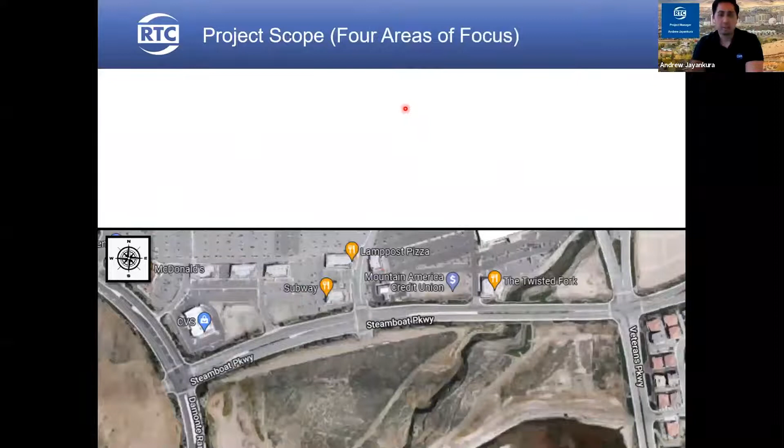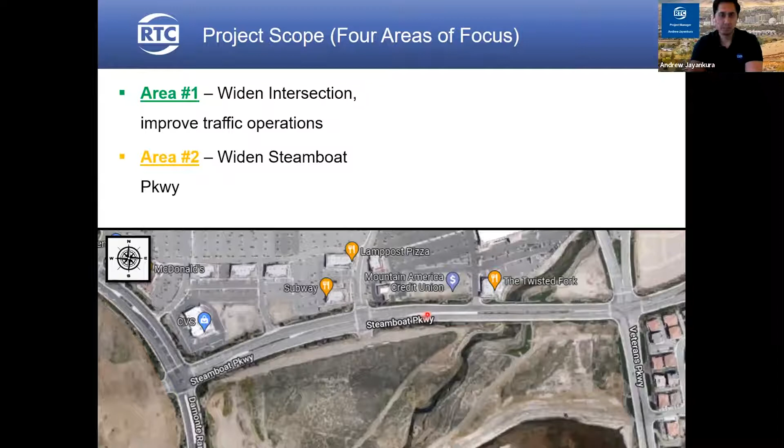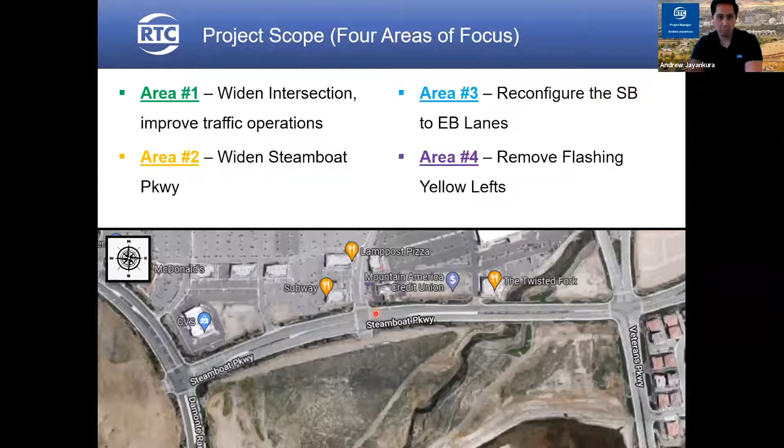Project scope: there are 4 areas of focus. The first is to widen the intersection and improve traffic operations at Steamboat Parkway and Veterans Parkway. Area 2, we're going to widen Steamboat Parkway from the current 4 lanes to 6 lanes, shown in the rectangle here. Area 3, we're going to look into reconfiguring the southbound to eastbound lanes at Damonte Ranch and Steamboat Parkway. And Area 4 will be removing the flashing yellow lefts at Marketplace and Steamboat.

Here's an overview of the 4 areas that we're going to look into improving along this project. Spend a moment here so you can take a quick look at it.

Let's move on to Area 1 and look at the highlights. Area 1 again, we'll be looking at the intersection of Steamboat and Veterans Parkway. Let's take a closer look at what we're going to be doing at this intersection.

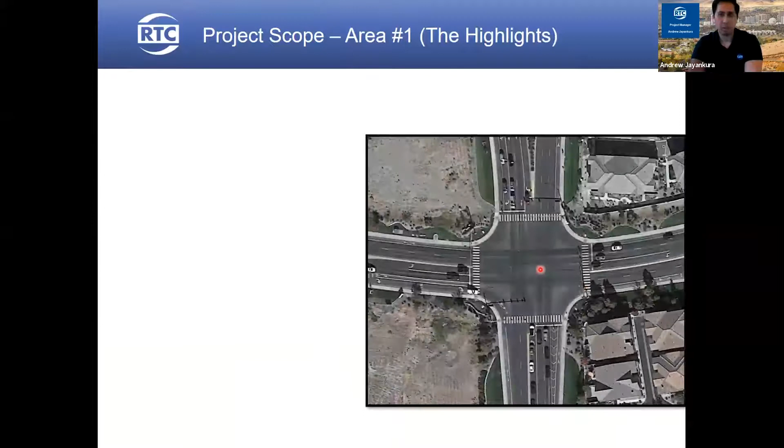Going eastbound, we're going to add an additional through lane, so the lane configuration will look something like this. Going westbound, we're going to add an additional westbound to northbound turn lane, so something like this. Going northbound, we're going to add an additional left turn and right turn lane, so something like this. And finally, for the southbound, we're going to add an additional left turn lane, so it will look something like this.

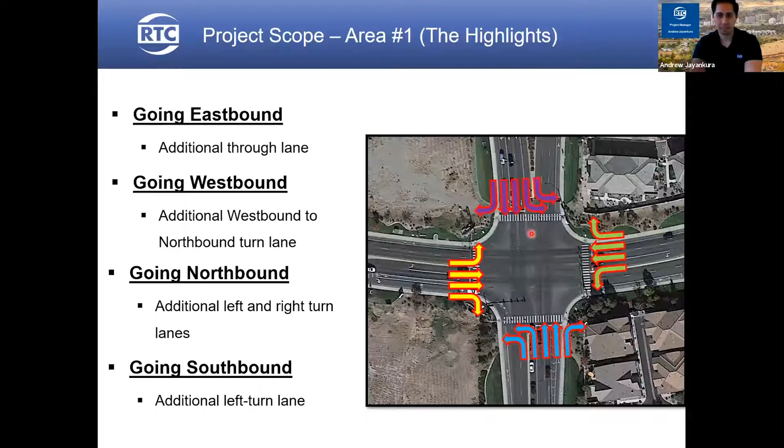Okay, so here's an image of what it is currently out there right now. And this is what it's going to look like after the project is completed.

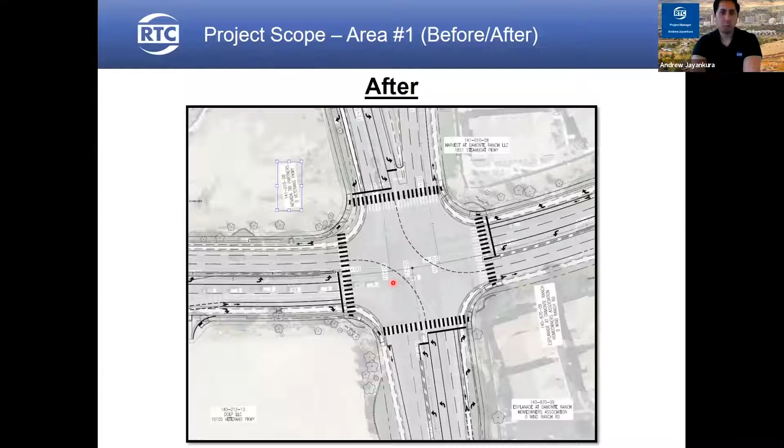Before I move on to area 2, there's been numerous questions regarding the northbound movement at Steamboat and Veterans Parkway about the lane alignment. So as of right now, the concern is the 2 lanes coming from the south side to go north. The left lane leads into this far left lane that merges over to the right and causes unnecessary congestion and slowdowns.

This project is going to address that issue. Conveniently, with the widening of the project and adding that left turn lane, the 2 northbound lanes will lead into the middle and right lanes, so that way we will not have that weaving or lane drop off anymore. And we'll be striping off the left lane so we won't have this issue anymore.

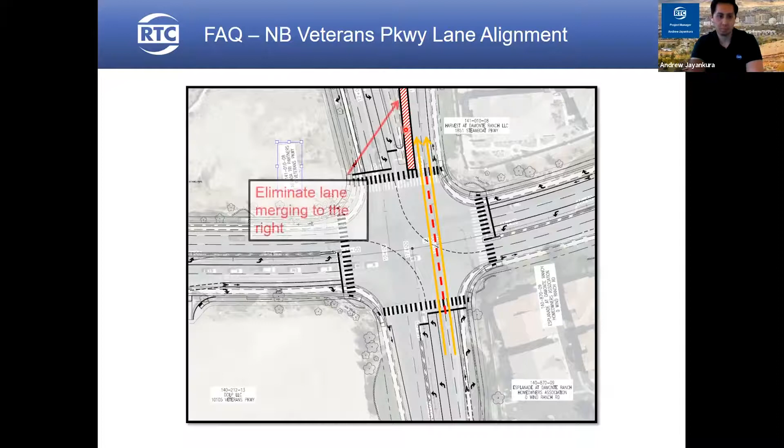And Andrew, I'm just going to ask a question while you're on where you are, just taking this in flow. So Garth is asking: is the removal of the flashing yellow left turn arrows at Marketplace required due to the widening to 3 lanes?

Yes, that's due to federal guidelines. Since we're going from 2 lanes to 3 lanes in the westbound direction, the guidelines require us to remove the flashing yellow arrows and go to just the normal green, yellow, and red arrows. We cannot have the flashing yellow lefts because of that configuration, due to safety.

Okay, everybody just keep the questions coming in. I'm going to take the ones that are really map specific as we go, and the ones that aren't we'll take towards the end. So go for it, Andrew.

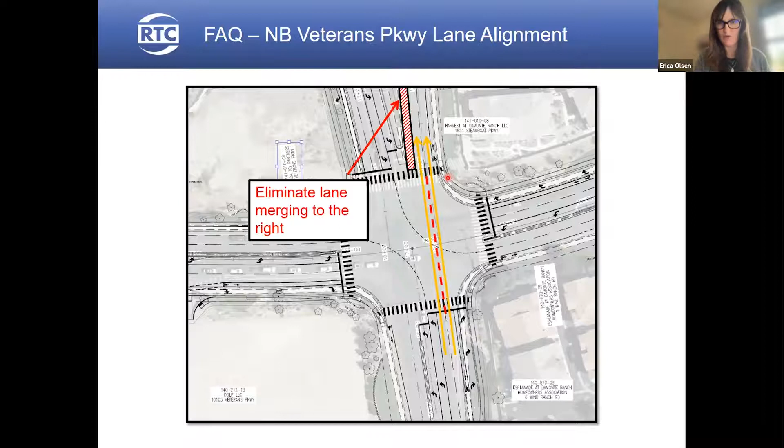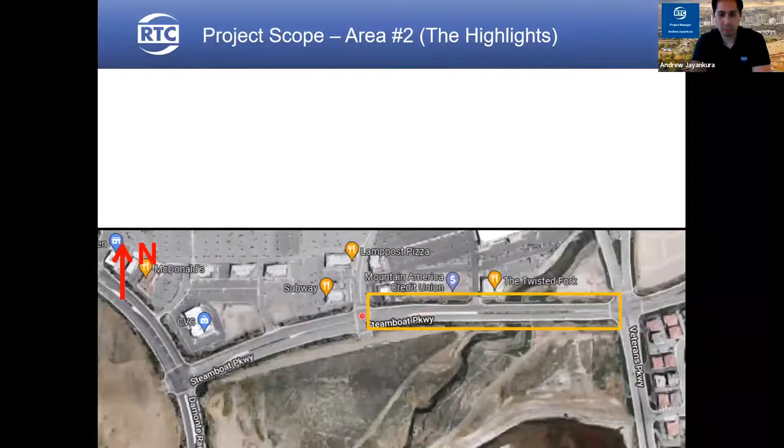All right, let's go on to focus area number 2. Area 2 we'll be looking at the widening between Marketplace and Veterans Parkway along Steamboat. Let's zoom in and take a closer look. The first focus is to add an additional through lane in both directions, so now we're going to have 3 lanes.

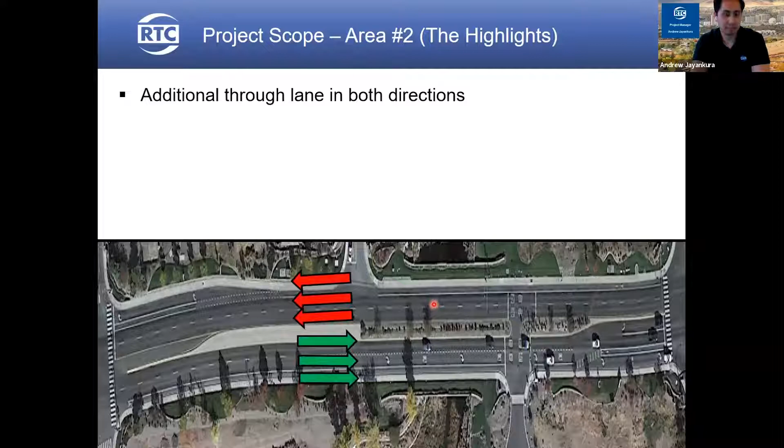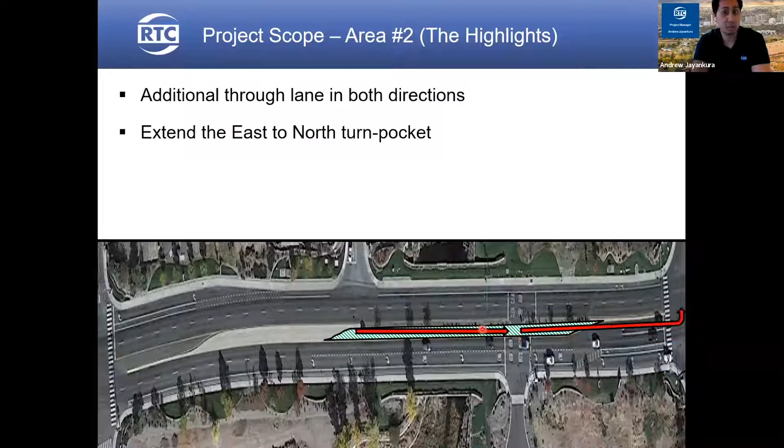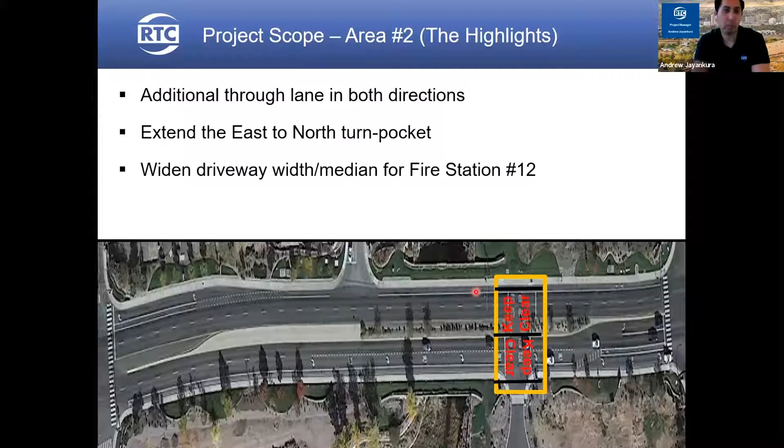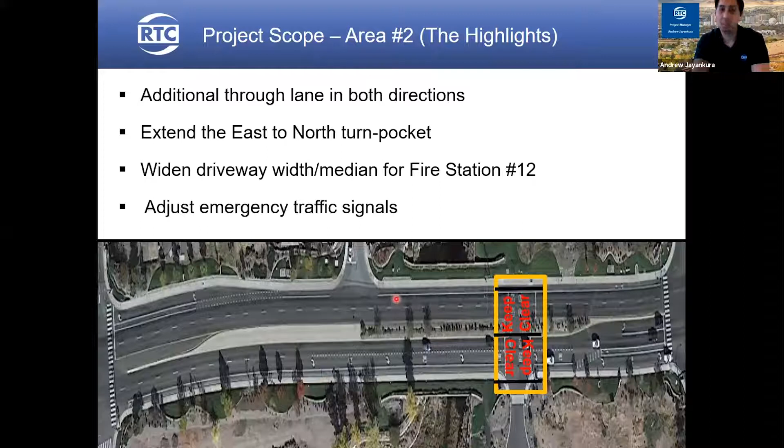Then we're going to extend the east to north turn pocket. As you can see here, it's short right now, but we're going to add more space in the turn bay so that more cars can be stored there to make that left turn. And then, with the request of Fire Station 12, we will widen their driveway and median width so their fire trucks can get in and out of the station more effectively to respond to emergency calls. And lastly, adjust the emergency traffic signals at this intersection.

Okay, so area 2, this is what it looks like currently, and this is what it will look like afterwards.

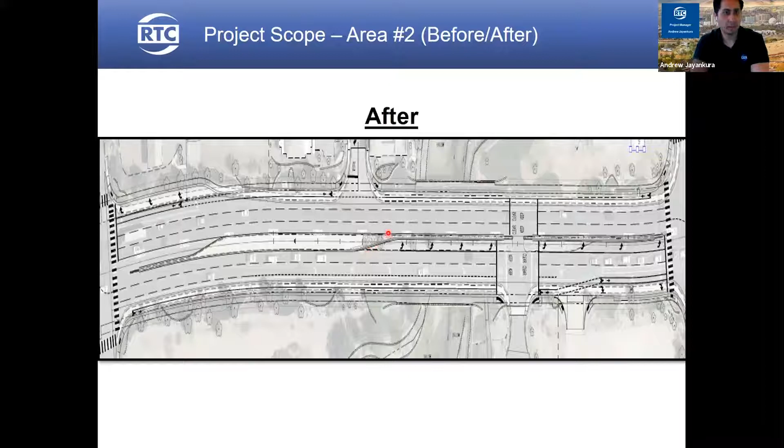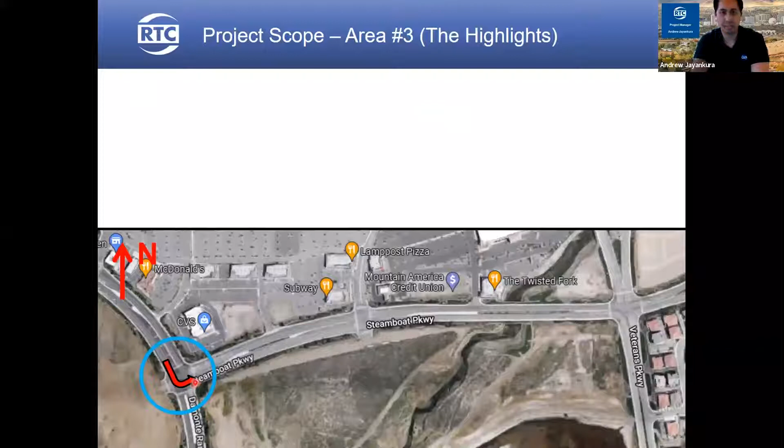Let's move on to area number 3. This will be the southbound to eastbound lane reconfiguration at Damonte Ranch Parkway and Steamboat Parkway. Currently, all drivers try to get into this far left lane to get into the left turn pockets to go east on Steamboat, so there's a lot of weaving, a lot of friction. We're going to try to alleviate that on this project.

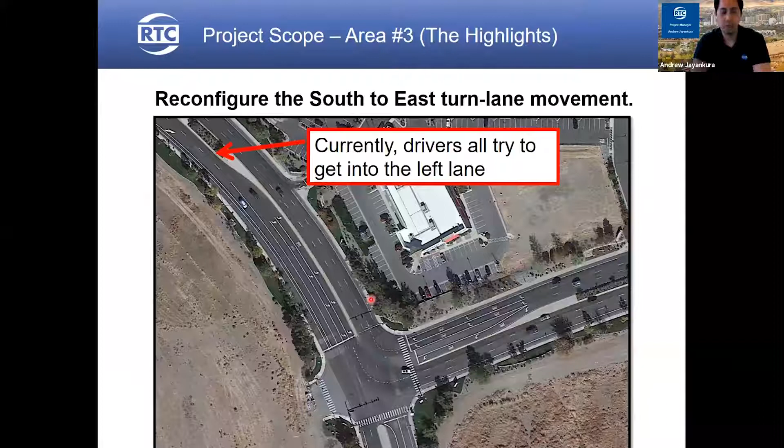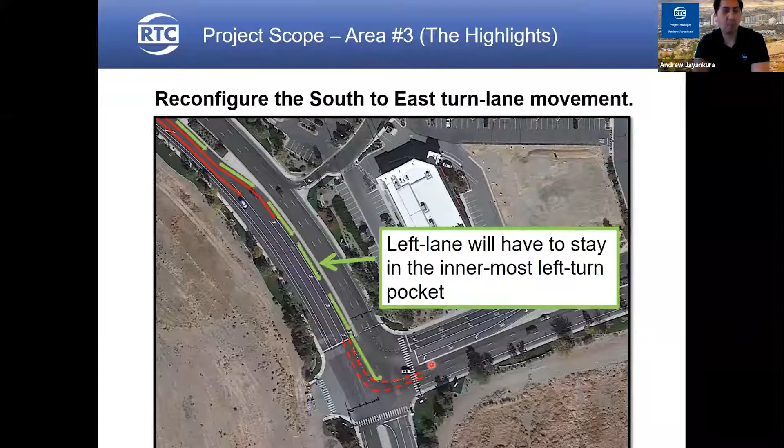How? We're going to go ahead and restripe this intersection. Now, with this configuration, the left lane will have to stay into the innermost lane to make a left turn, which will lead them into the far left lane. Then, if you're in the middle lane, you have an option to go into the middle left turn lane to go to the middle lane on Steamboat, or you can go into a shared through or left turn lane to go into the far right lane going eastbound on Steamboat.

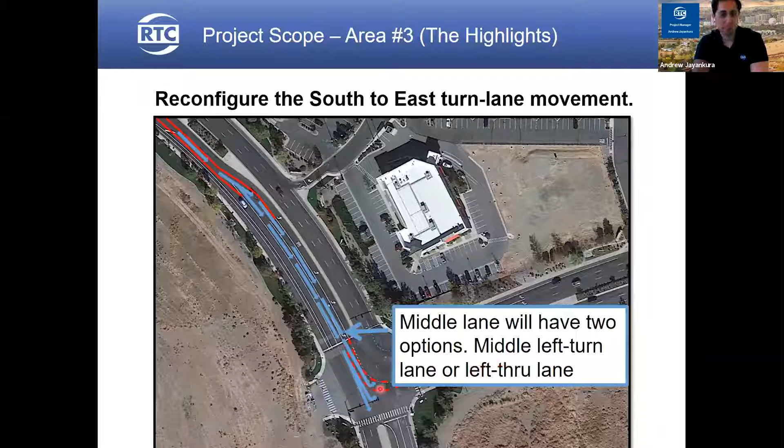And then finally, we're going to have another lane that will lead into a southbound through movement to go south on Damonte Ranch Parkway if needed.

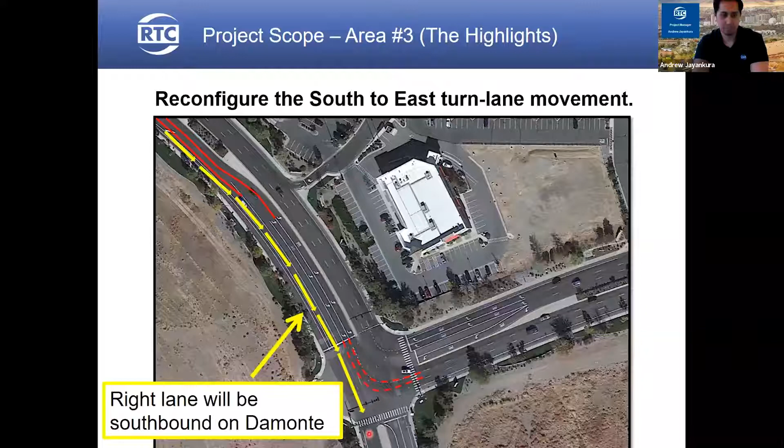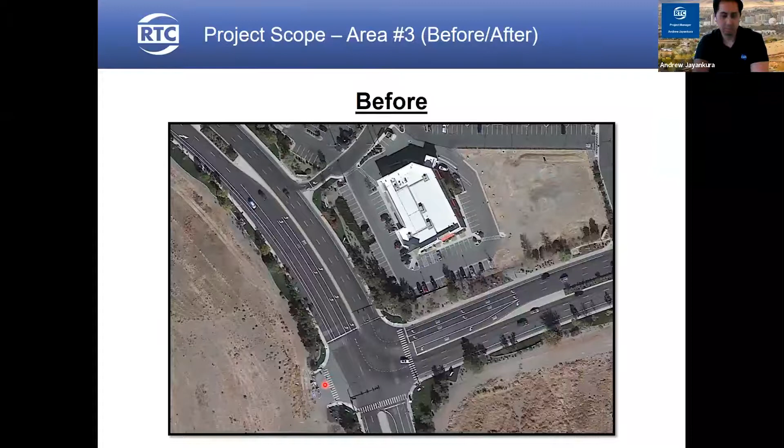So this is what it looks like right now, and this is what it will look like after the project's completed: 2 left turn lanes and the shared left through. Hopefully they will provide better flow and less friction between drivers trying to fight into the left turn pockets.

Okay, so we'll look into the landscape. This is the proposed landscape that we're—oh, sorry.

Can we just jump back for a sec on those turn lanes? Are there markings in the turn lanes to indicate that micromobility users can use the turn lanes as well?

We haven't looked into that, but we will see if we can look into doing something like that. We still will preserve the bike lane going south. As you can see right here, this is still the bike lane, so that's what we have. But we'll look into that if we can accommodate it.

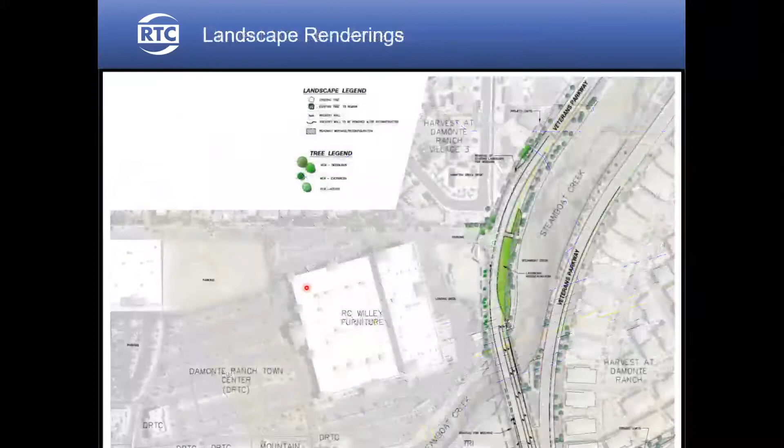Andrew, this is Naomi. I don't ride bikes in this type of congested area, but I can imagine if you're a bike rider and you want to turn left onto Steamboat, you'd be pretty uncertain how to do that, since otherwise you'd have to cross the go-through lane. So I'm not sure how that's supposed to happen.

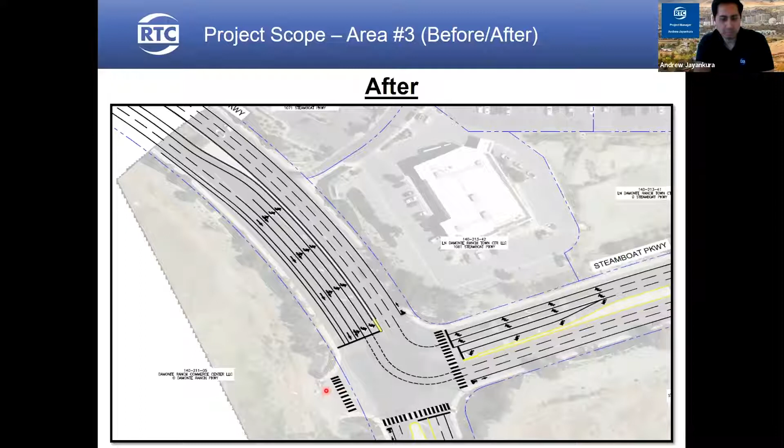So it looks like right now we have it so that you would have to cross the intersection and then go to the other side to get to the eastbound, because I think there's just going to be a lot of friction here. But it's something we'll have to relook at to see if we can include a bike lane to go east.

Moving on to landscape. For every tree we remove on this project for the widening, we will replace it in kind. So this is a rendering of what it will look like.

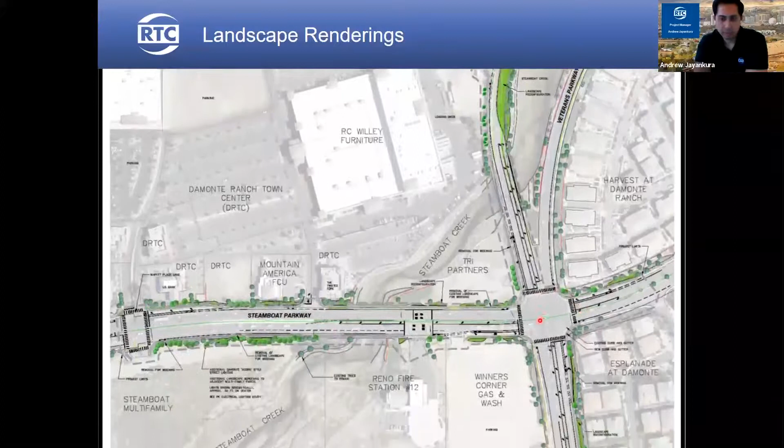Here is RC Willey. This plot will roll north, so you can see the entirety of the project and what it'll look like. Here is Steamboat Parkway. Here's the Veterans and Steamboat Parkway intersection. And then here's the new gas station that will be coming in.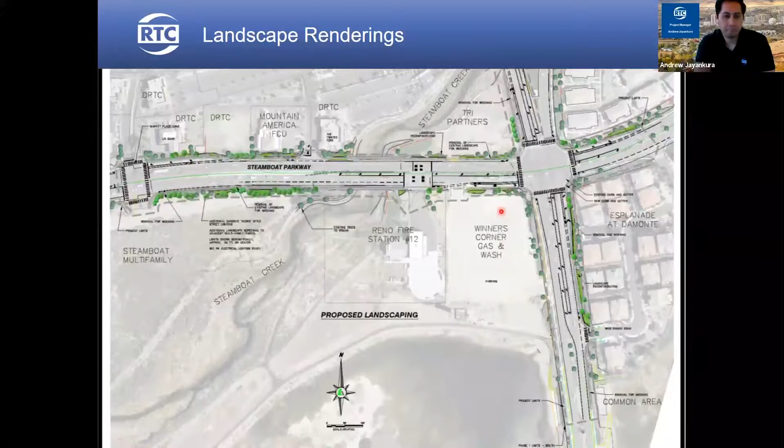Here's a more close-up view of the landscape. This is the south leg of Veterans and Steamboat Parkway. This is going north to make the left to go west. And then this is the north leg. This is the southbound lanes to go east on Steamboat.

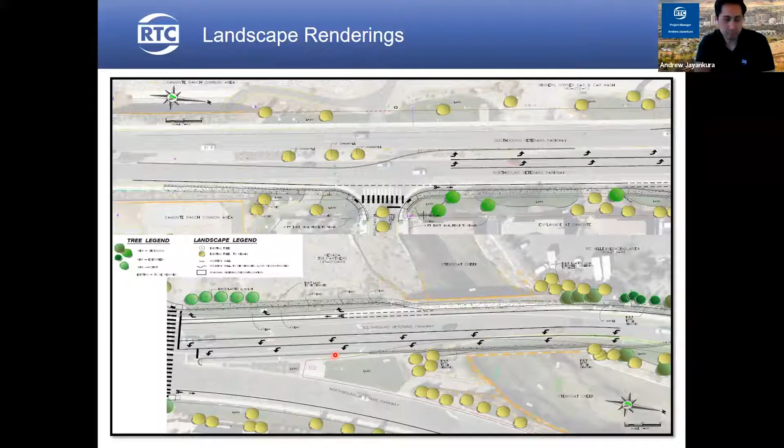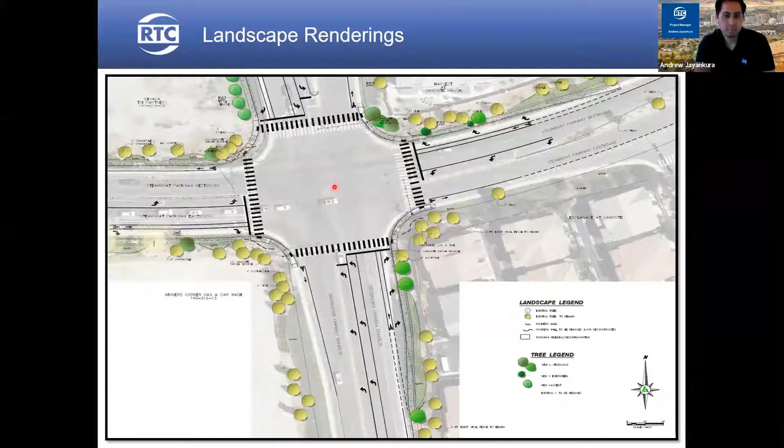Here's a landscape rendering of the intersection of Steamboat and Veterans. And here is a landscape rendering of Steamboat Parkway between Marketplace and Veterans to the east over here.

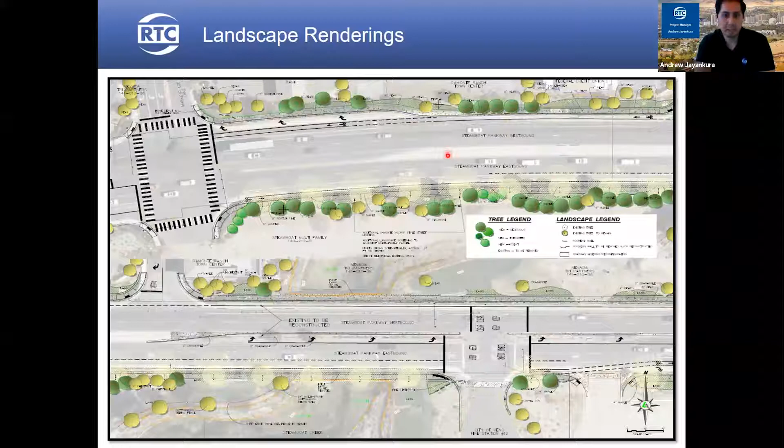We'll also be adding lighting along Steamboat to meet city requirements, which will help increase safety and illumination along this roadway during the nighttime. Here's a landscape lighting sample of what it will look like when the project is done. These luminaires, currently the ones existing out there, will be about 55 feet apart. So this is a sample of what it would look like.

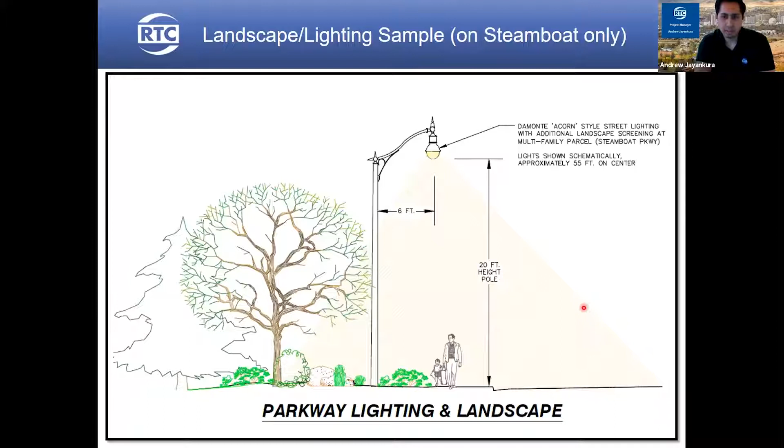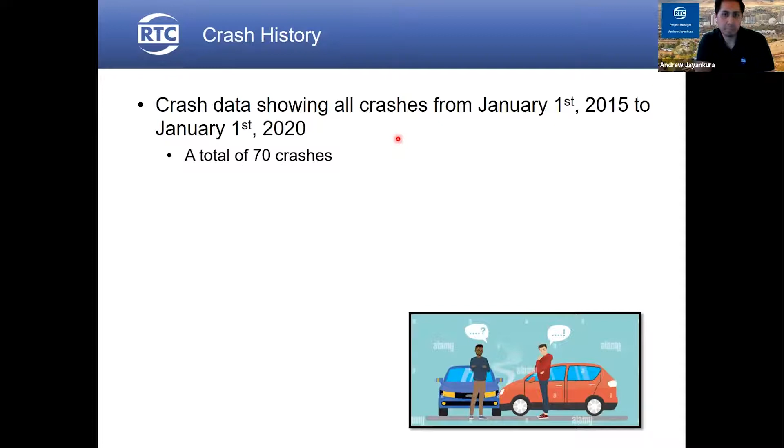Moving on, let's look at the crash history of the corridor. We collected crash data over a 5-year period between January 1st, 2015 and January 1st, 2020. The data shows there were a total of 70 crashes between Damonte Ranch Parkway and Veterans Parkway along Steamboat. Most occurred during daylight hours and clear conditions.

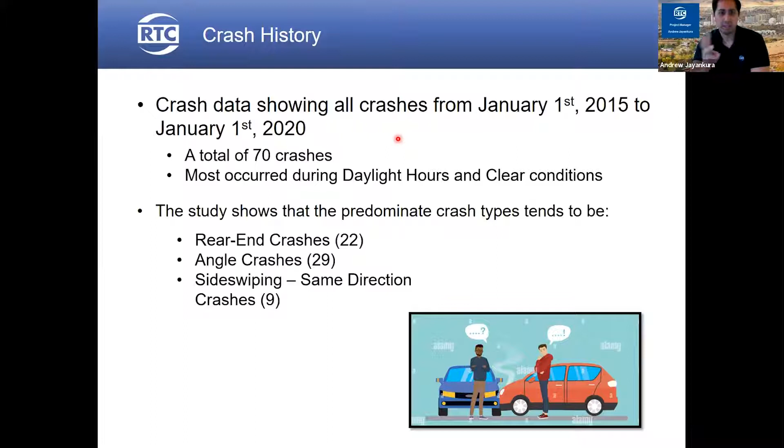The study shows the predominant type of crashes tend to be rear end crashes, angle crashes, and side-swiping crashes, followed by non-collision crashes, head-on crashes, and unknown crashes. And lastly, 2 involving motorcycles and a crash involving a bus.

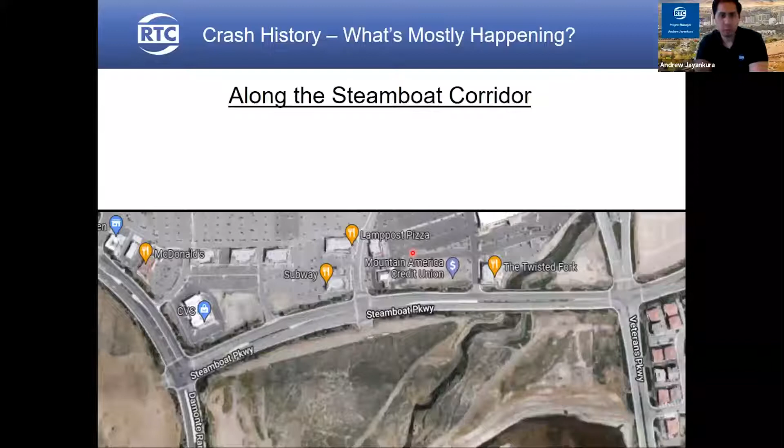So what's mostly happening with those? Along the Steamboat corridor, 41% of all crashes were angle crashes. Of that 41%, 92% of those crashes were the northbound Veterans to westbound Steamboat movement, which is that left turn.

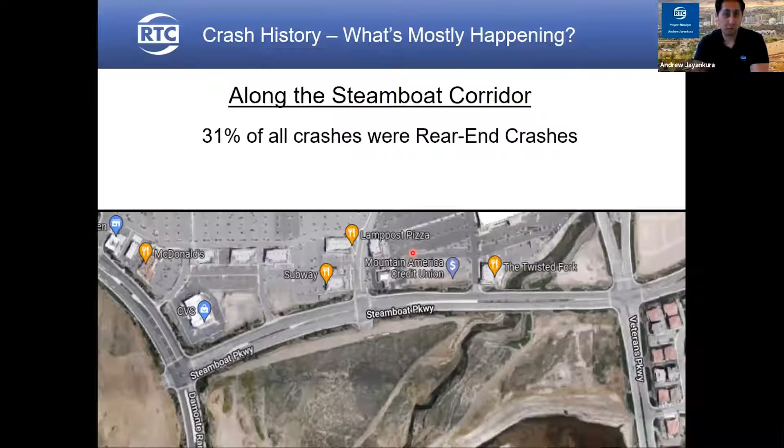31% of all the crashes were rear end crashes, 70% of that in the eastbound direction on Steamboat Parkway. And lastly, 12% of all crashes were side-swiping crashes that happened mostly in the eastbound direction, 56% of that.

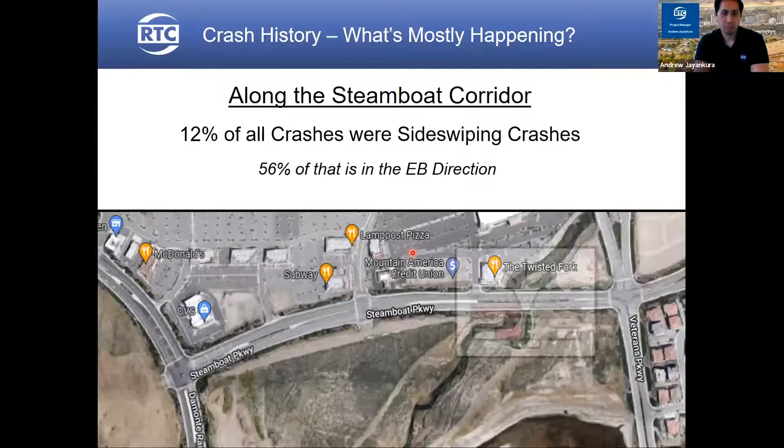So hopefully with this project, we can reduce the number of these crashes that's been happening along this corridor. So what about the schedule of this project?

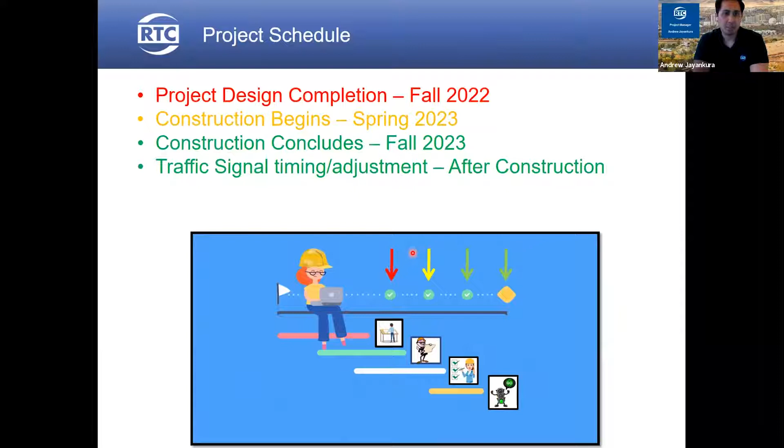We anticipate the project design completion sometime in the fall of this year, with construction beginning in spring of 2023, construction concluding in fall of 2023, and traffic signal timing and adjustment after construction. And as we mentioned before, the schedule is tentative and subject to change.

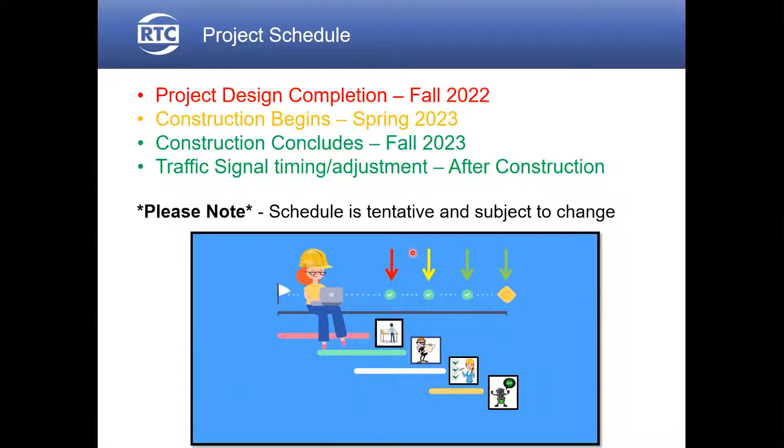With that, that concludes our presentation on the Steamboat project. We hope you guys have gotten valuable information on this, and we look forward to your comments and questions.

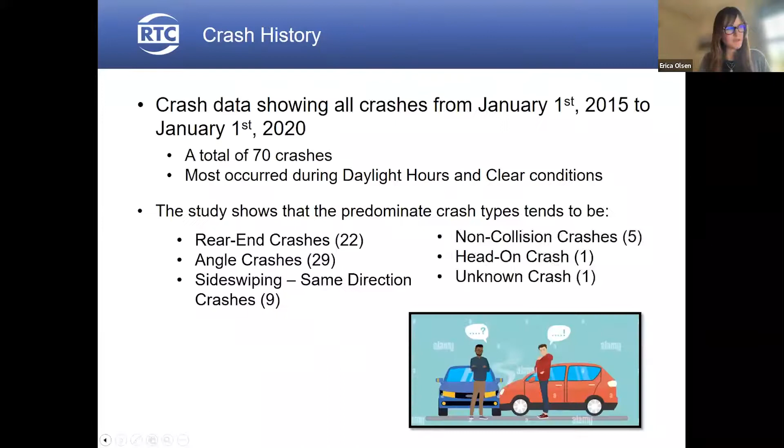Andrew, thank you so much, super informative. I think maybe could we pull up that summary slide that just has the overall view of the project? We've got some pretty specific questions that we'd like to have that visual in front of us for. And while you're getting there, there were quite a few questions about timing, which you addressed, but one question was: is this project fully funded as we sit here today?

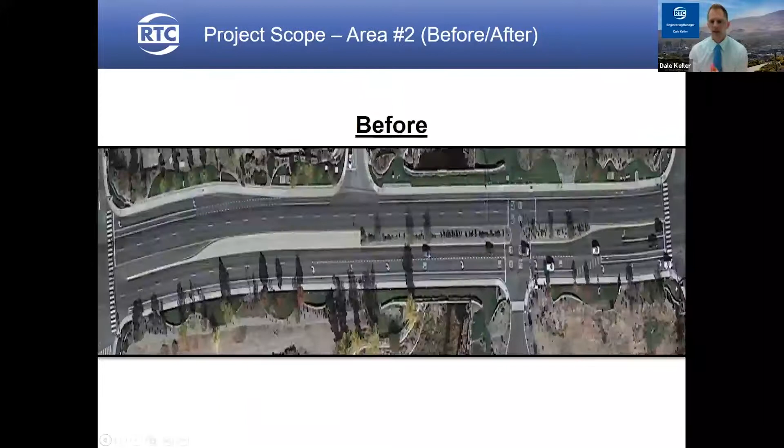This is Dale Keller. I can help answer that question. Yes, it is fully funded and is slated, as Andrew said, for construction in spring of 2023.

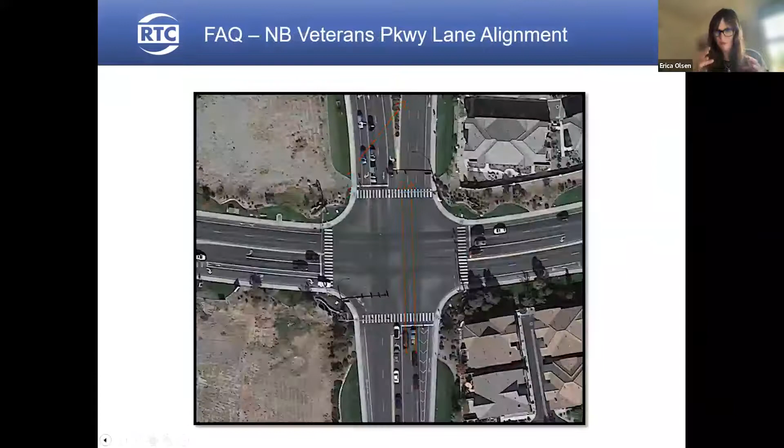Okay, awesome. I'm going to take some non-project specific things for just a minute. There are questions related to considerations for the species of trees, bushes, and grasses being planted to support birds and other wildlife. What's the approach to choices related to landscaping?

I can answer this one. We've been coordinating with the Damonte Ranch HOA consultant about what specific species of trees to select or replace along the Steamboat project. We're taking that into consideration to make sure we get the best available species that will accommodate bird species, but also live with the native soil in the area.

Okay, a couple other quick questions about that. Will trees include lawns with water as a priority? Lawns can feel kind of wasted. What's the approach to the use of lawn?

We will still try to maintain the lawns. The expectation is that with the widening, the area of the lawns will be reduced with this project.

In terms of maintenance, to expand a bit on what Andrew discussed, we're ensuring that the new City of Reno standards about providing a buffer between the sidewalk and the lawn are being installed. Where there are areas too small to maintain, we're working closely with the HOA who maintains the landscape along this area to ensure what we're replacing is what they would like to maintain.

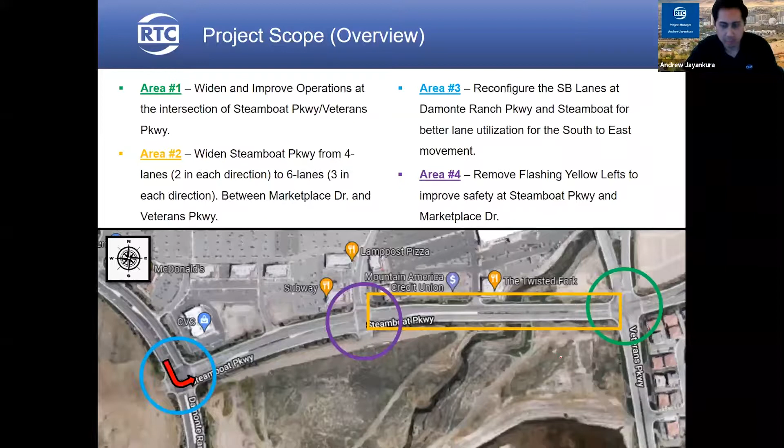So if I go to Winners and then I want to go east on Steamboat, how do I do that? If you go to the gas station, you can still make the right out onto Steamboat to go east on the north side. So if you can see my cursor right here, let me zoom into this. Here's going to be the new driveway right here, right? So it's going to be a right in and a right out, so you can continue going east on Steamboat.

So Andrew, what I'm worried about there is that it's such a short distance that if a person wants to go into that middle lane to go straight, they're going to have to cross across the people turning right, and it could cause some congestion right there.

Yeah, I think that's a great question from Judy and a great point from the councilwoman. Is that something we'll have to look at with our access management guidelines to ensure what type of stripe we put there for that turn pocket? If it's too close to the intersection, or if there's enough distance away to legally and safely make that turn, we'll have to look into that during our final design. If it's too close and not safe, we'll make sure that stripe is a solid white line, forcing you to turn right. We need to look into that a little bit closer.

Okay, so I'm just looking at the other questions that are here as well. Let's just make sure. Mark, I think we addressed your questions - if not, raise your hand and we'll bring you in. And then there's just a question about who is responsible for

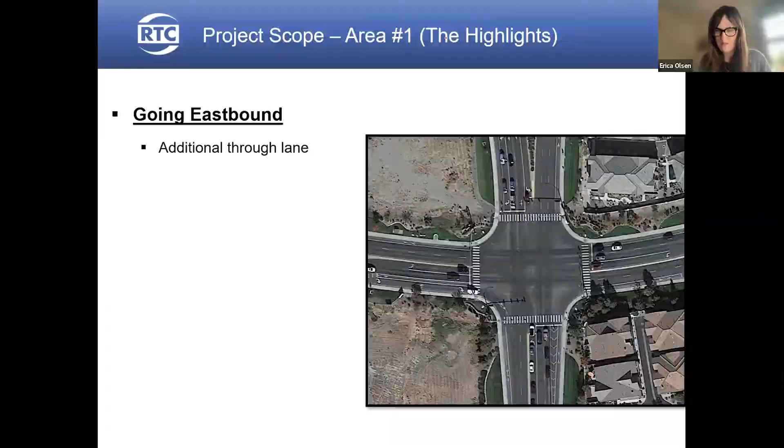Andrew, if you wouldn't mind allowing me to screen share, I do want to make sure that I put up on the screen how folks can stay informed related to this project. And then Councilmember Duerr, I know you have some closing comments to make. Sure. So just really quickly, it sounds like when we're putting our notes together, there will be another informational meeting in the fall. That's correct, right, Dale and Andrew?

Correct. Yes. Okay, please sign up for the newsletter at rtcwashoe.com. And then you can see right here the link to stay informed about this project specifically. I'm going to highlight it. Just make a note of that, and you'll get all the information to stay informed as this project progresses.

So with that, Councilmember Duerr, closing comments? Sure. Do you want to close this screen share? I will. Just wanted to make sure people got that link. Oh yeah, absolutely. Yep. And maybe, what I was going to suggest is like with our other meetings, we have everyone who attended the Zoom, there's an email, and maybe we could automatically add them to stay updated on the Steamboat project rather than have them do a separate sign up.

It's just an idea. Number two, I'm just extremely grateful to both Andrew and Dale for sharing their evening with us. There were so many interesting questions at the NAB, and they agreed to do this as a way to do further outreach. It was extremely successful. We had something close to 75 people, I think, at one point join us. And so that's a whole bunch of people who got questions answered.